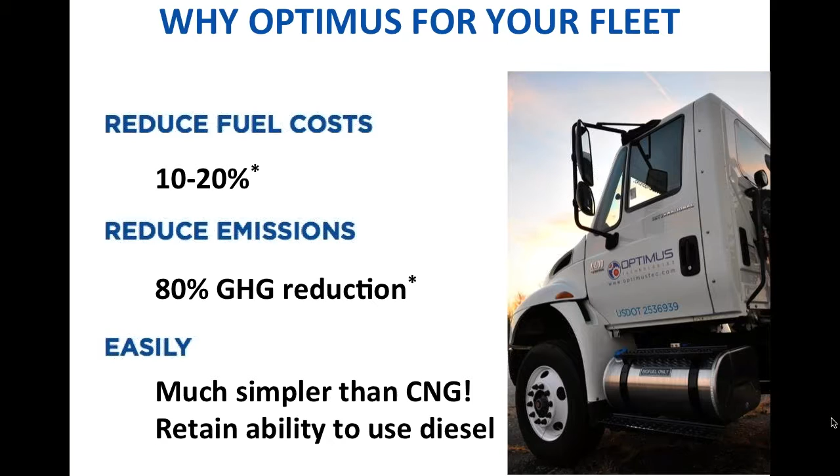Lastly, the technology is very easy to implement. Typical installations occur over the course of a day, at most 2. The systems never inhibit the vehicle's ability to operate on traditional diesel, which enables the trucks to be completely flexible in terms of fueling operations and operational logistics.

With that, let's talk a little bit about the background of Optimus. We were founded in 2010, and we're based here in Pittsburgh, Pennsylvania. The past 5 years for us have been primarily in research and development. We deployed a pilot project in 2013 with the City of Pittsburgh, and we achieved EPA approval in May of 2014. We are the first and only EPA-approved biofuel conversion technology for the medium and heavy-duty truck market.

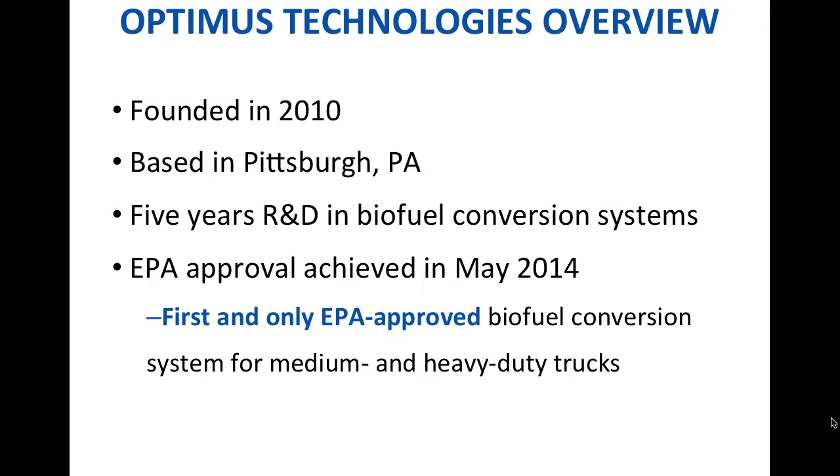On applications that traditionally have saddle configurations, we will replace one of the fuel tanks with a dedicated biofuel tank. In applications that only have a single tank, we can do a number of options, including adding an additional biofuel tank or creating a larger dual-chambered tank that houses both the diesel and the biofuel within one tank in separate compartments.

Moving from the vector fuel tank, we go to the vector manifold. This vector manifold is the core of the mechanical system, which processes the fuel on board, making it suitable for use regardless of temperature or climate operations.

The entirety of the system is controlled by an electronic control unit, or ECU, which is installed in conjunction with the auxiliary system. This ECU not only controls all of the parameters and system operations of the vector, but also ties into the engine's ECU and reads passive data from the engine performance and engine control modules.

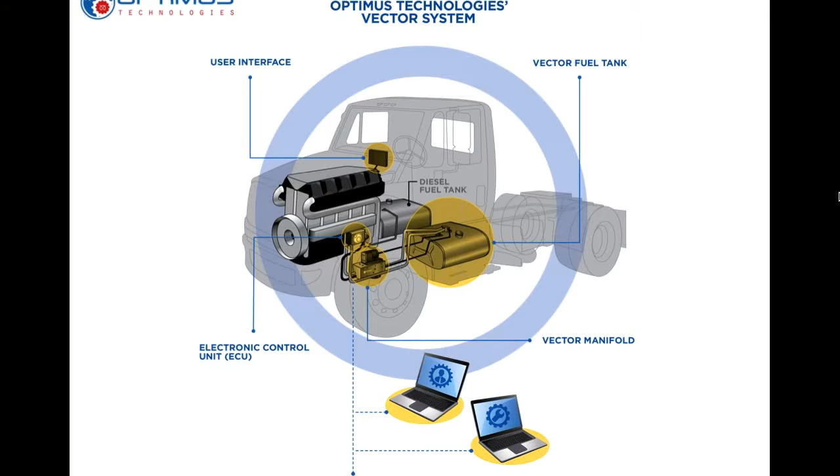The entire system comes together at the user interface, which is the primary point of interaction between the vector system and the driver. The vector technology is completely automated and requires no hands-on user interaction. That said, the user interface serves two primary functions.

The first is as a fuel gauge for the vector fuel tank. This gives the operator a dedicated fuel gauge for the biofuel system, which enables us to retain the dash fuel gauge for the traditional diesel tank.

Secondly, the user interface serves to indicate to the driver which system the vehicle is currently operating on. As I mentioned earlier, the vector system is a completely automated device. However, we are giving the driver the ability to see which system is currently engaged. We'll talk a little bit more about that later.

Lastly, the electronic control unit, during its operation, is collecting a wide range of data and performance analytics. This information is stored on board the vehicle and transferred to a remote application when the truck arrives back at its home base. The performance analytics and metrics are then post-processed and provided to the user via a web application.

So my role today, I wanted to explain a little bit about the work that we've done with Optimus and the vector system here in the City of Pittsburgh.

So our journey in sustainability has really started particularly around the role that we have in my office in creating the city's climate action plan. And the work that we have founded there is really designed to look internally and externally with regards to sustainability and the applications of sustainability across the city's operations platform.

We operate 300 facilities. We have 1,100 plus vehicles in our fleet and 3,000 employees. The Optimus project has been a great example of the city really being a laboratory to test, improve, and then deploy new technologies that help us, one, with our sustainability, but also improve the service that we give to the residents of the city of Pittsburgh.

We started with Optimus back in the spring of 2013, where we tested and outfitted 5 heavy-duty trucks, typical to the one that you see there in the picture, that are used for plowing, hauling, and heavy-duty applications.

So these trucks are used as snow plows for hauling salt, for asphalt and road repairs, and for leaf and debris removal. The system utilized animal fat biofuel and was able to survive 2 of the harshest winters that we have on recent records. So we were able to survive the polar vortexes of 2013 and 2014.

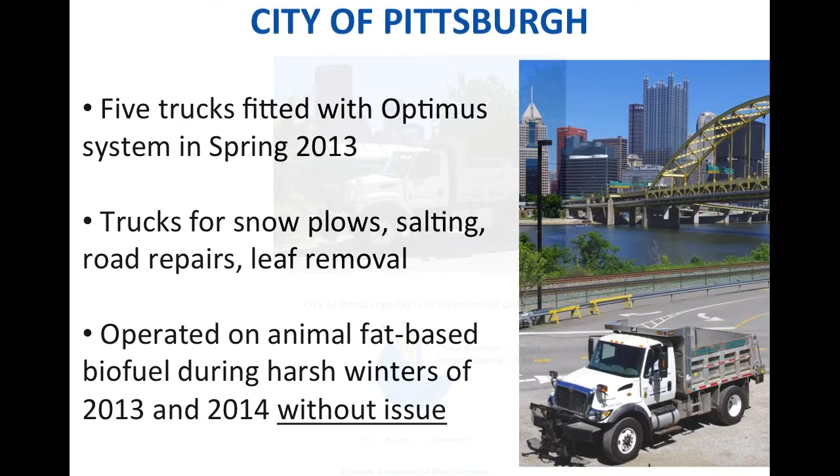One of the key things that we see in the operations is that we have been able to make an offset in our diesel usage by 80 to 90%. So using the runtime hours, about 91, or a little over 90%, of our operations with those heavy duty trucks have been using the biofuel that we've used through the Optimus technology.

The other breakdowns include just the warm-up period, about 7%, and 2% of conventional diesel on the initial startup of the vehicle.

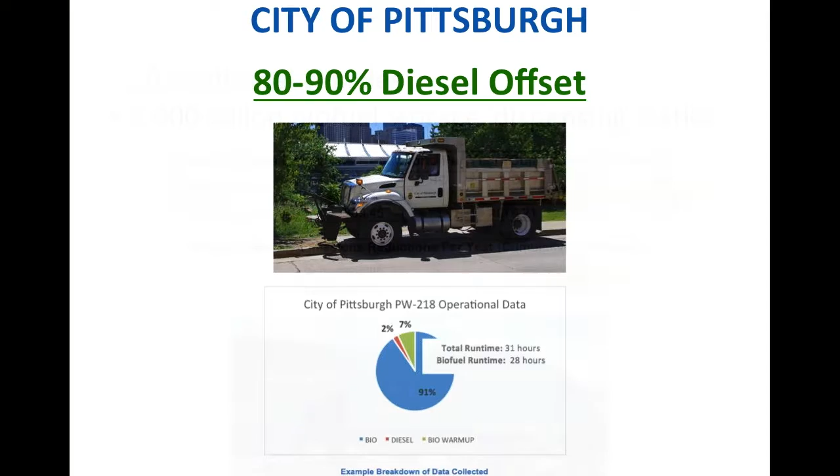With the success of the pilot program, we've been able to evaluate and test the product, which has given us great confidence in expanding the use of the Vector system to an additional 20 vehicles.

So following the completion of the pilot program, we also engaged with local Pittsburgh-based foundation, the Heinz Endowments, to undertake the first fleet baseline inventory within the city of Pittsburgh. So looking at our fleet in its entirety in terms of the different types of fuels, operational needs, and emissions that are produced by our 1,100 plus vehicles.

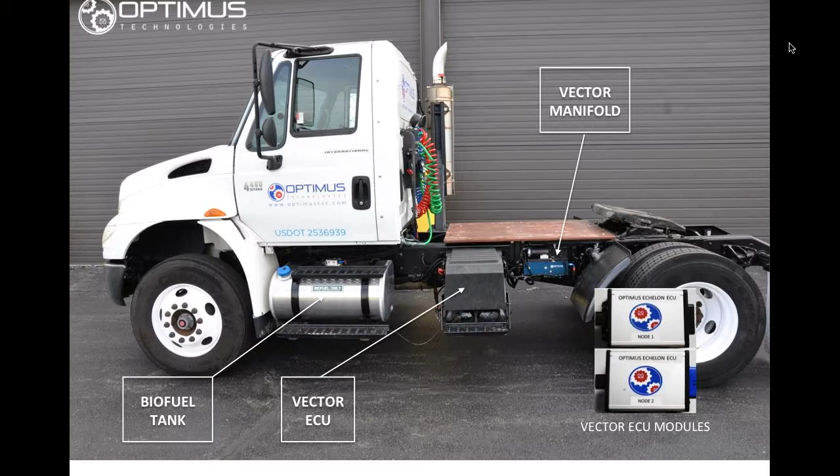This image here clarifies a little further the previous diagram that was displayed. This is a real-world example of the retrofit addition. We can see in the lower left-hand corner the biofuel tank. Again, this tank is added as a replacement unit for a traditional diesel tank that was mounted in that location. This fuel tank enables operation on 100% biofuel. There's a heating element which protrudes in the center of the tank.

And in the mirrored location on this vehicle, the original diesel tank remains. In applications where a larger fuel tank would be required, this tank could be expanded from a 50-gallon to a 70-gallon capacity and would protrude further to the right-hand side where the battery box is located.

Next, moving to the right, we have the Vector ECU. The ECU modules are mounted within the battery compartment. These modules are ruggedized and waterproof to ensure trouble-free operation. However, for convenience, these are mounted within the battery box on this configuration, which enables easy access for both installation and programming.

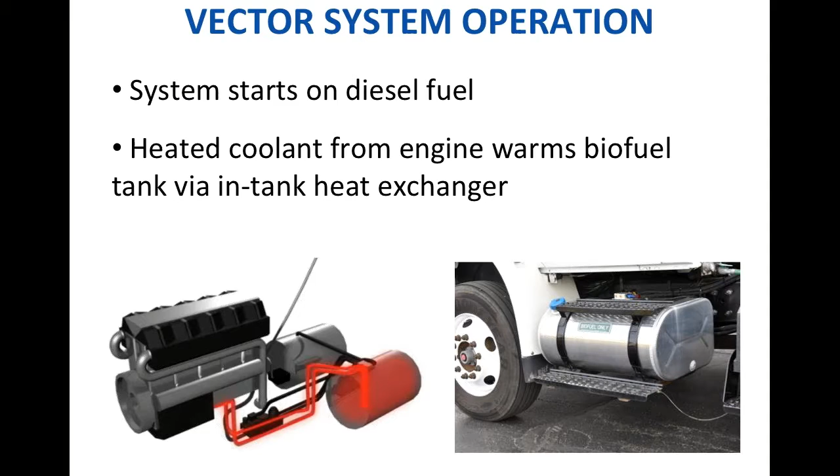As mentioned previously, the engine will start on traditional diesel or whatever blend of biodiesel is typically being utilized. With the City of Pittsburgh, their diesel fuel is replaced by a B5 or a B20 fuel. That fuel is utilized to start the engine and circulate hot engine coolant throughout the vector system.

As shown in the image on the left, hot engine coolant circulates through both the vector processing module, which acts as a heat exchanger, as well as the fuel tank. The next image here is a view into a fuel tank with the fuel level sending unit and in-tank heat exchanger shown. The fuel here is the animal fat-based biodiesel being utilized in the City of Pittsburgh, and it shows that in the tank during cold weather operations, on startup of the vehicle, these fuels can be completely gelled and not impact the performance or operation of the vehicle.

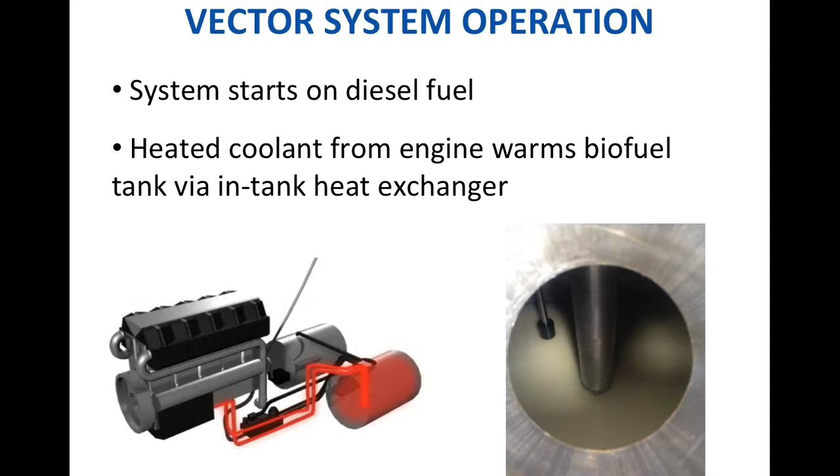These animal fat-based fuels are solid at a temperature between 35 and 40 degrees. However, because the vehicle is being started on the low biodiesel blend or traditional diesel fuel, the gelling of this fuel does not impact the operation of the vehicle.

As the system warms up, the operation transitions from traditional diesel to a recirculation or warm-up mode. That not only heats the fuel tank and the processing module, but circulates fuel throughout the entire system so that when the biofuel system is engaged, the fuel has been adequately heated.

This operation is the biofuel warm-up and processing module. The module pumps fuel from the tank to the engine and back, enabling 100% of the system to be heated prior to engagement.

During this time, the electronic control unit is monitoring biofuel temperature, pressure, and flow parameters, as well as various engine and ECU parameters, to ensure the biofuel system does not engage during a time when ideal operating conditions have not been met.

Once the software completes these safety checks and cycles through the variety of warm-up parameters, the system switches from traditional diesel or your low blend biodiesel to 100% biofuel.

This occurs at any point throughout the operation of the vehicle. It can occur at idle, under load, or during deceleration. This process happens completely automatically and requires no feedback or interaction from the driver.

In the event that any of the system parameters and operational conditions have not been met, the vector system will not engage.

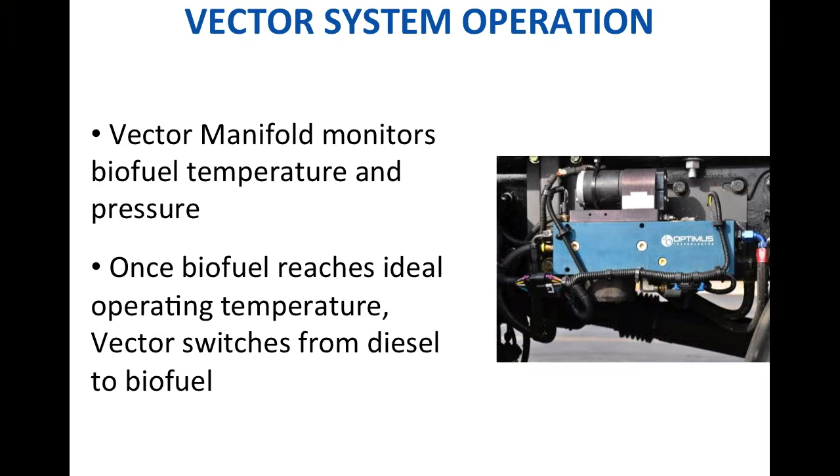In the event that the driver did not have a full tank of fuel and was operating on anything less than 10%, the system itself would not engage. The vehicle would continue to operate on traditional diesel. This ensures that the vehicle is not left inhibited in any way by the lack of refueling on the biofuel side, or in an over-the-road application, the lack of an available pump for the biofuel.

The vehicle will monitor and self-adjust based on these parameters. Typical operation of the system is between 85 and 90% on 100% biofuel. This is because in normal working conditions, the vehicle, started at the beginning of the day, will operate on traditional diesel for between 5 and 10 minutes, and then continue operating on 100% biofuel for the remainder of the operation.

As I mentioned previously, the electronic control unit is collecting data within the vehicle, within the vector system, and of the operation of the system. Each vehicle has its own profile, which can be configured through the web dashboard. This enables vehicle-specific tracking, as well as operational, maintenance, or logistical notations on a per vehicle basis.

The data from these vehicles is collected and aggregated and available to be viewed in both the aggregate or on a per vehicle basis. These graphs can present information to the user such as CO2 reduction, tailpipe emission reduction, overall system runtime, as well as a per gallon vehicle displacement number to understand how much diesel is being replaced throughout the use of the systems.

There's 6 months of historical data that's available on demand, as well as yearly and daily reports that can be provided to the fleet user or technician.

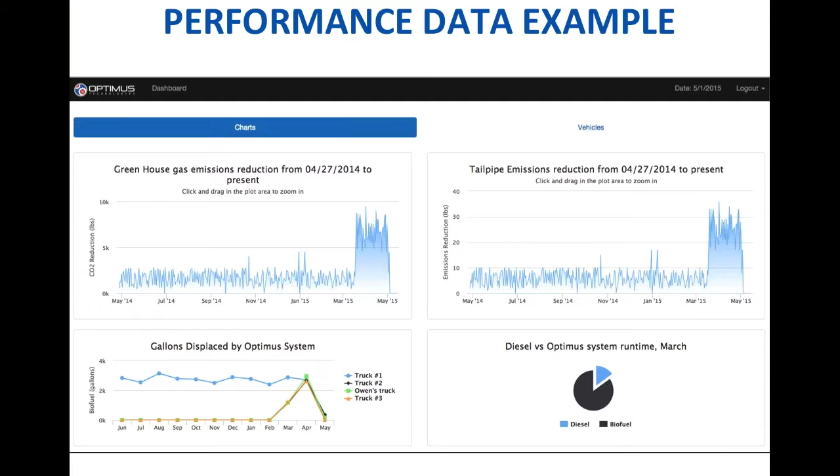We'll transition now to talking about the ideal case of the Vector application. We see ideal use of the system in municipal and commercial fleets that are typically return-to-base or have limited numbers of refueling operations. This enables 100% biofuel to be provided to the end customer at a dedicated refueling point. On the municipal side, refuse and plow operations, which consume the largest number of gallons of diesel fuel, are typically best suited. On the commercial side, regional haulers and heavy use vehicles are the best case use scenarios for this type of technology.

As Andrew mentioned previously, our technology is designed to utilize a wide range of various fuels. Although biodiesel is considered a drop-in fuel, it presents a number of logistical challenges for use at 100% concentration in fleets that operate in cold weather climates and are concerned about performance and logistical operations. The Vector system eliminates these challenges that are typically associated with pure biodiesel.

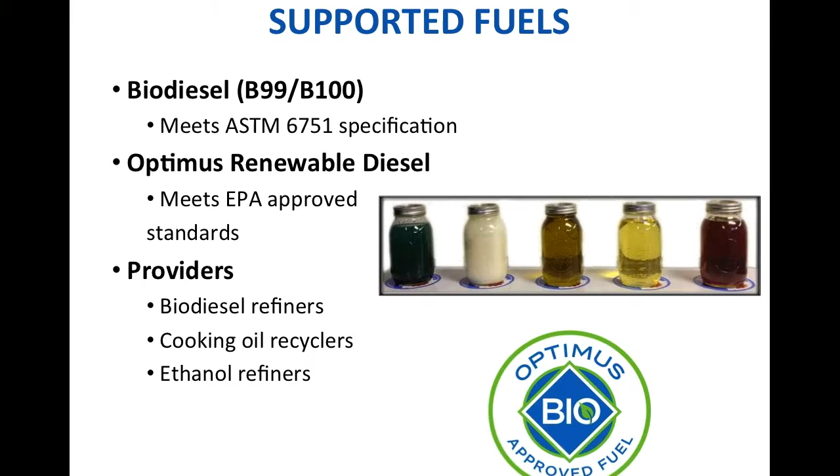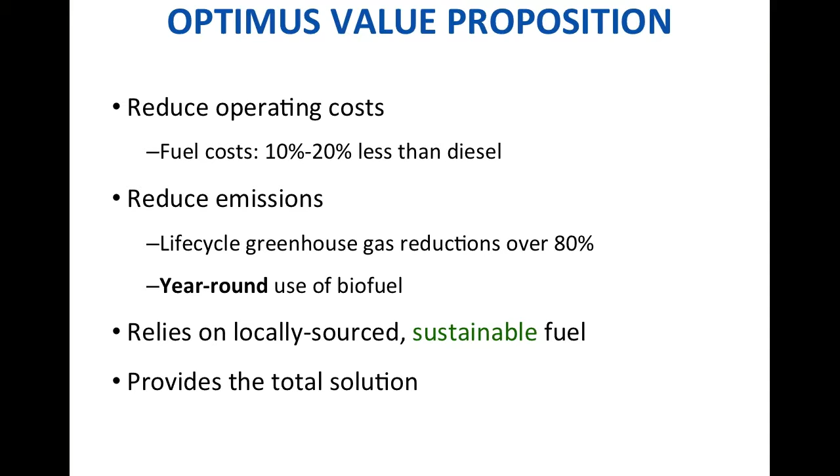Recapping the value proposition: the technology enables a wide range of fuels which allow operators to reduce fuel costs between 10 and 20%, reduce life cycle greenhouse gas emissions over 80%, and enable year-round use of biofuels rather than traditionally deployed 5% or 20% blends. These fuels are locally sourced and sustainable, and Optimus provides the total solution of both fueling networks, fueling stations, as well as the vehicle technology.

As discussed previously, Optimus can guarantee a 10% cost savings versus the current retail price of diesel. As the markets fluctuate, this price can increase or decrease, as much as 20%. However, over the course of time, the average fuel savings a user will see is above 10%.

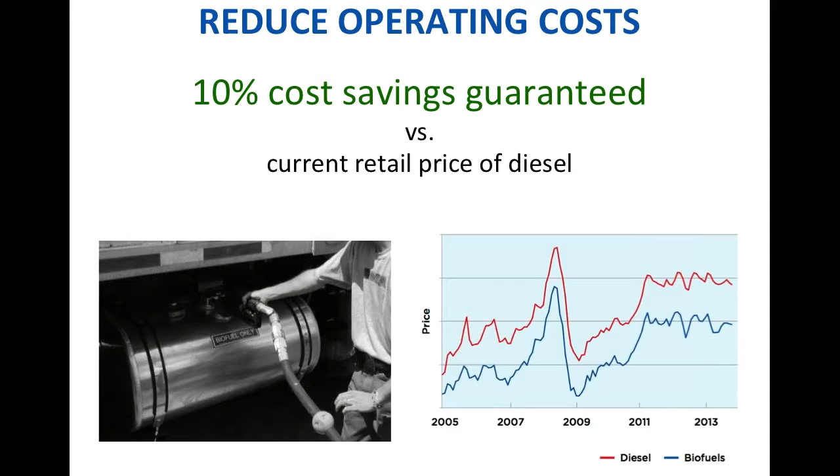From an emission reduction standpoint, here's a quick scenario of what a fleet using 100,000 gallons of fuel per year might see utilizing the Optimus system on B100. Most notably is the substantial reduction in PM, on average a 50% reduction over baseline diesel. This PM reduction number is relevant to vehicles both equipped with DPF systems and without.

In applications that currently have diesel particulate filters, the Optimus system enables a reduction of 50% engine out emissions, which provides longer service intervals on the diesel particulate filter and substantially lessens the burden of cycle from the DPF.

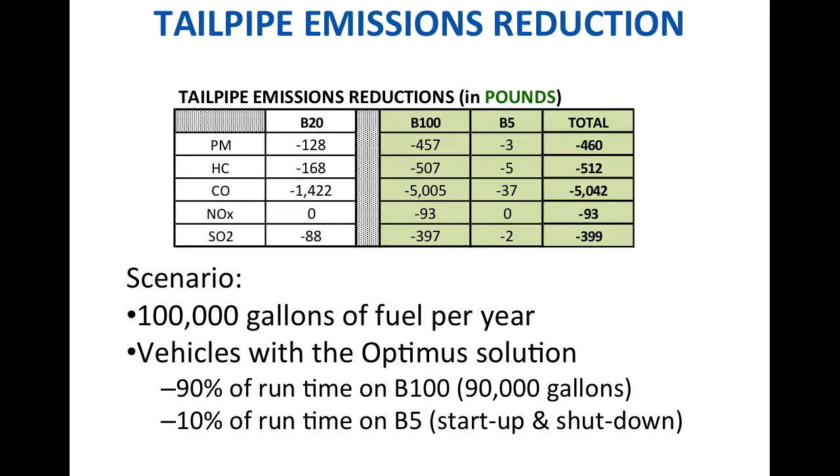The overall life cycle greenhouse gas emissions in CO2e are presented here. Again, these are approximately 80% reduction over baseline diesel and can achieve substantial reductions over the traditional B5 or B20 blends.

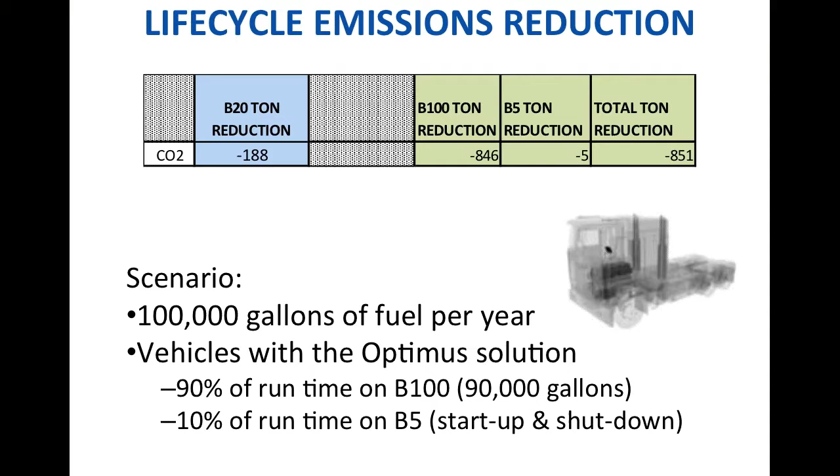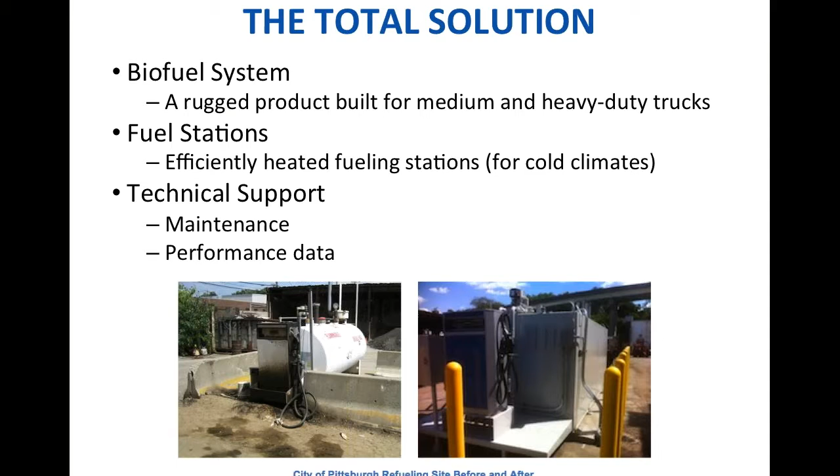Optimus provides not only the fuel systems and the fueling stations, but we also offer maintenance, support, and performance data. The image here shows the City of Pittsburgh refueling station prior to upgrade for the Optimus project. The station on the left was pure diesel. The station on the right is an efficiently heated dual chamber biofuel tank that dispenses both diesel and biofuel and has a total volume storage capacity of 5,000 gallons.

Let's transition now and talk a little bit more about some of the specific opportunities available to fleets within the Ohio, Indiana, and Michigan regions. The Midwest Drives Initiative is a project of Clean Fuels Ohio in partnership with the Department of Energy and other Clean Cities coalitions. Optimus Technologies is proud to be a partner in this project, and it enables end users to reduce the barriers to alternative fuel vehicle usage by offering demonstration and system validation.

The Midwest Drives Initiative benefits participating fleets by enabling them to deploy real-world alternative fuel vehicles within their fleet with low or no risk. There's a large education component of the system and of the project, which enables fleets to be eligible for alternative fuel incentives and financing, and allows the fleet to displace petroleum usage in a very rapid and low-risk manner.

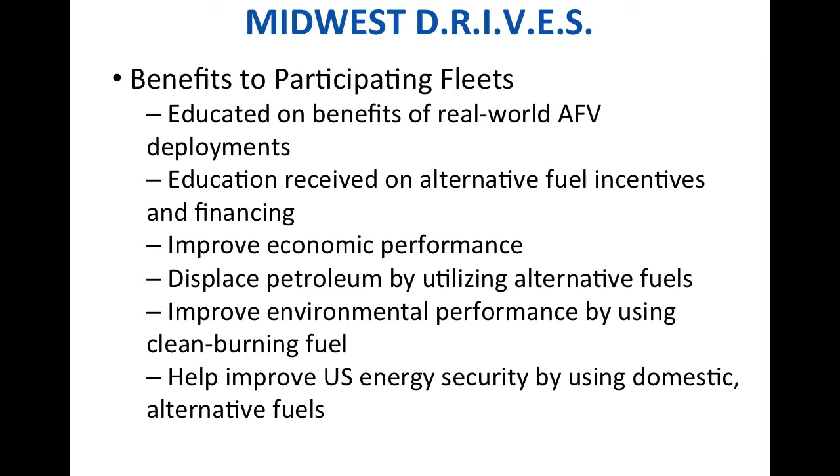Specifics to the Midwest Drives program and Optimus's partnership with Clean Fuels Ohio: we're offering a 6-month pilot duration. These pilot projects are available for 2 vehicles with no upfront cost. The Optimus solution would be installed on 2 vehicles for an end user. The program would include the Vector system, Vector installation, driver and technician training, as well as a refueling station suitable for the 2 pilot vehicles.

This program is available only to Ohio, Indiana, and Michigan fleets. Vehicles must be registered within those states in order to be eligible for the no-cost pilot program.

During this 6-month pilot program, performance data will be collected on the vehicles in partnership with Clean Fuels Ohio, Vision Fleet, and the National Renewable Energy Laboratory. Case studies of deployment will be built and deployed as an educational component of the program. At the conclusion of the 6-month pilot, fleets have the opportunity to purchase the Vector units for a reduced cost or have the Vector units removed from their fleet.

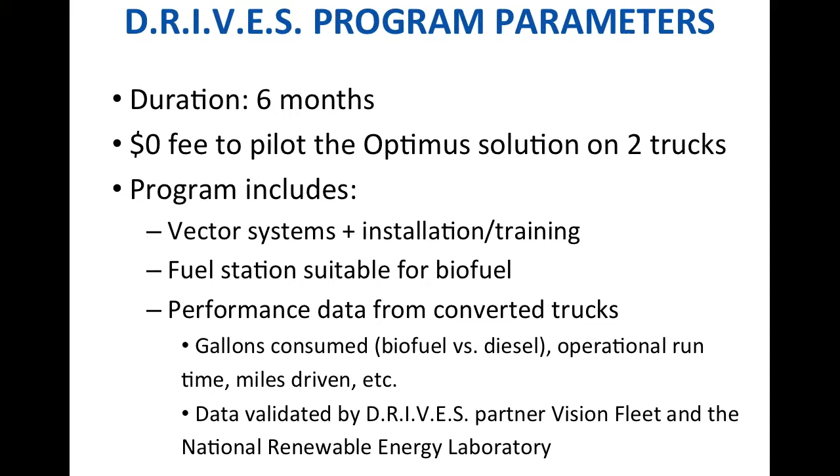The total system cost for the Vector is approximately $10,000 per vehicle. The pilot fee is roughly one quarter of the total purchase price.

As a next step, fleets located within Ohio, Indiana, and Michigan should reach out to either Clean Fuels Ohio or Optimus regarding Midwest Drives. Additional program details and documentation can be provided, as well as an assessment of your current fleet to understand which vehicles would be best suited for deployment.

Fleets outside of those regions can reach out directly to Optimus to learn more about our pilot program. The contact information for myself and Andrew is presented here and will be made available to all webinar attendees.